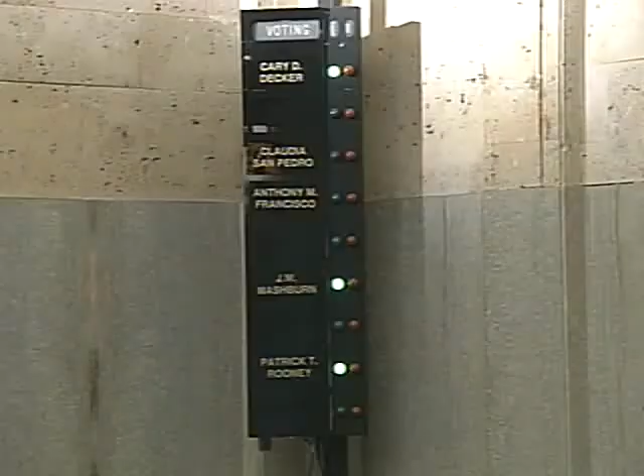Next, we need to move into our suburban request for funding. Agenda 3A is to approve the application of funding for the Moore Public School District scoreboard at Moore High School in the amount of $596,669. The only additional information I might add is at the time of the application, there was about $1.3 million in the Moore Public School account. This will leave a remaining balance of $757,000 for future project applications. The application meets the requirements of the MOU, and we recommend approval.

Do we need to approve these individually, or can we do it all as a group? Individually. All right, I'll make the motion, Mr. Chairman. The second. Quick question, do all three schools play at the same stadium? My understanding is that they do, that they have one primary stadium, but I can confirm that. The answer is yes.

Well, we're going to approve these as a group, I believe, aren't we? Right, and we have a motion. We need a second to the motion. Second. All right, then we'll vote. All in favor? Aye. Motion passes. Now, do we need to move on to B and C? No, that's included. We don't need any discussion on any of those. Okay.

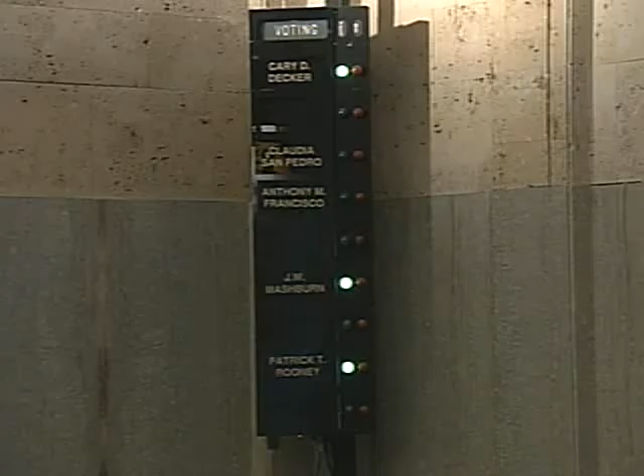The next item, item 6 on the agenda, is the approval of the schematic design report for project ES0063 at Arthur Elementary School. Thank you, Mr. Chairman. We're pleased to bring this schematic design to you today. It is Arthur Elementary. Boynton Williams and Associates is here representing this project and can make that presentation and also answer any questions that you may have.

I'm Christian Ballard, project architect at Boynton Williams Associates. I'm here to give our schematic design presentation for Arthur Elementary. Arthur Elementary is an elementary school located at Southwest 51st and Independence, and our task is through new construction and a complete renovation to bring this facility up to contemporary standards.

604 students. The existing facility is roughly 34,000 square feet, and we're proposing 24,685 square feet of addition.

The new addition will include media center, health clinic, administration, new restrooms, information technology, as all of your projects do. We have had our staff meetings, our teacher meetings, our community meetings, and we're here to present the scope of the project and also some input from them.

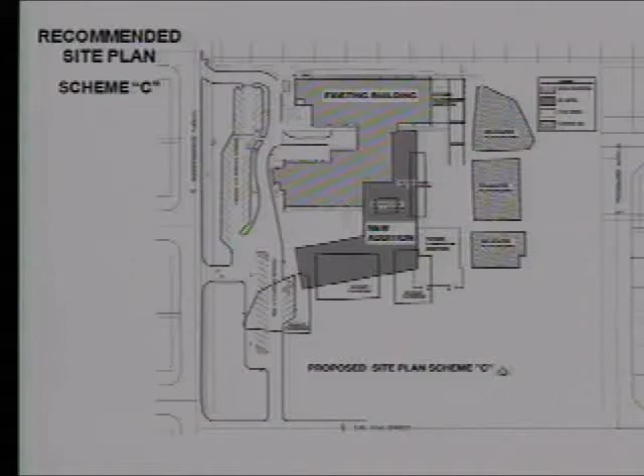Again, the new addition includes items such as previously stated mechanical systems. In addition to those, renovation items include playground equipment. This is skipping forward, I'm sorry. Which way is backwards? All right, I apologize for that. Once again, I'll start over.

The new addition will include an administration area, student health services, information technology, and restrooms, which was a big thing for the staff. Renovations include window replacement, window blinds, lighting upgrades, additional exterior parking, paint throughout, and plumbing upgrades.

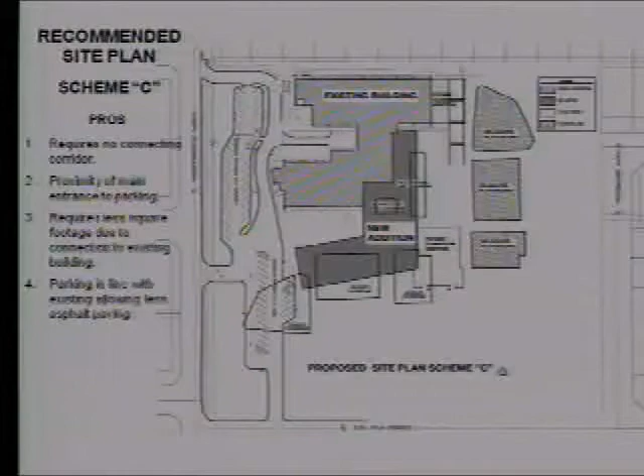This right here, Scheme C, is our recommended site plan. The pros of this include a drop-off location on the southwest portion of the new addition, and it's a very compact design. We're adding 21 parking spaces and increasing the parent drop-off area.

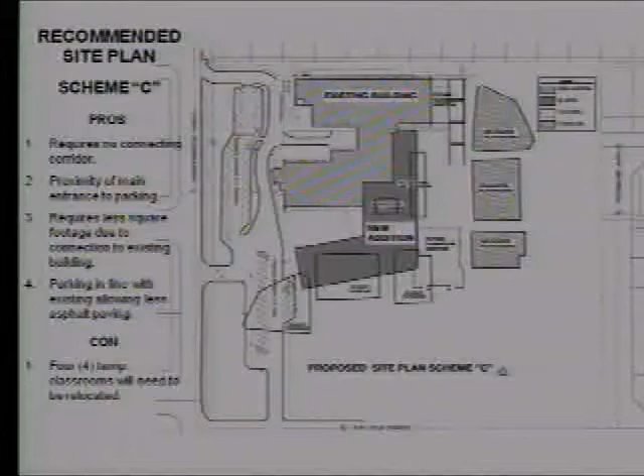A con of this design plan is that there are some temporary classrooms that are going to have to be relocated.

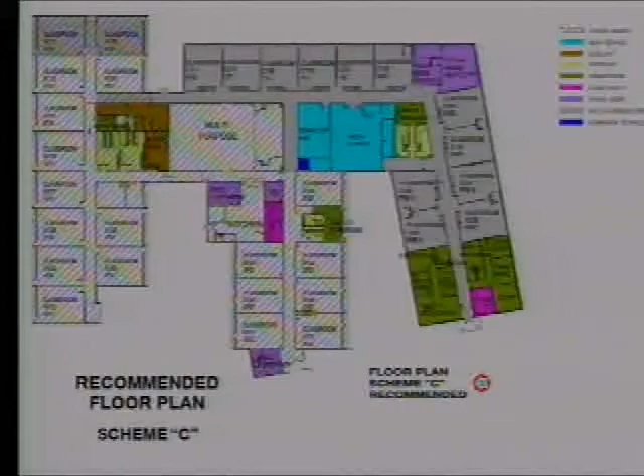Again, the administrative space we're adding is roughly 2,000 square feet. Student services, roughly 300 square feet. The health clinic, again, roughly 300 square feet. Total classroom additions, I think we're adding 16 classrooms, totaling roughly 10,300 square feet. The new media center, the existing media center, is in 2 classrooms that were initially designed that way and broken up into a media center.

It's definitely not a contemporary look, and we've added a new centralized media center. As you can see, we've also added some faculty restrooms. Again, the existing facility is roughly 34,000 square feet. The new addition is 24,600 some odd square feet, for a total facility square footage of 58,679 square feet.

Our cost estimate here is for the new addition, roughly $3.5 million. For the renovation, roughly $2 million. You see right there, we're a little bit under our PIP budget estimate. And we're right here in schematic design, and if approved, we're ready to start on preliminary design and continue on with the process. So again, I'll entertain any questions that you have.

Any questions or discussion? Cost per square foot on the new construction, what is it running today? Cost per square foot? I don't actually recall that amount. Okay.

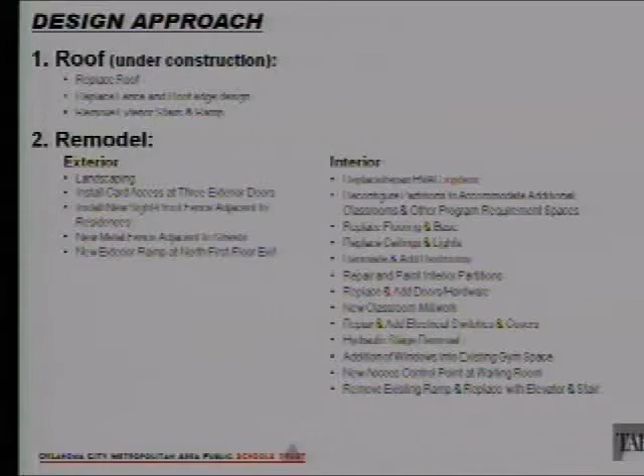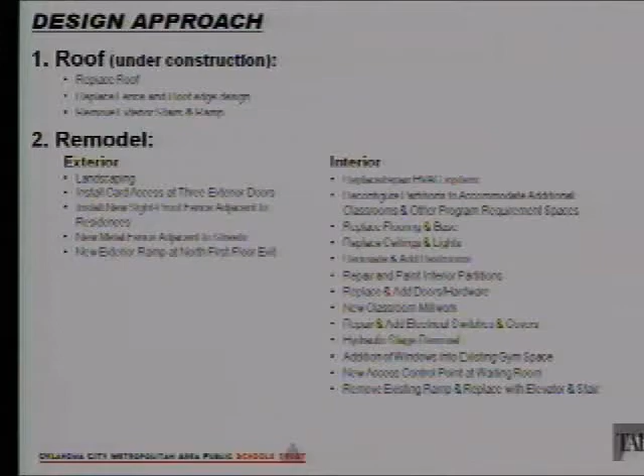Continuing on with the remodel portion of this project, Eugene Field is located at 1515 North Klein in Oklahoma City. This project has no building addition, only interior renovation with a few site modifications. We're completely modifying the air conditioning system, as it was not up to date and was causing humidity problems. We're also updating finishes, as is typical with the MAPS renovation, and updating the restrooms to be ADA compliant.

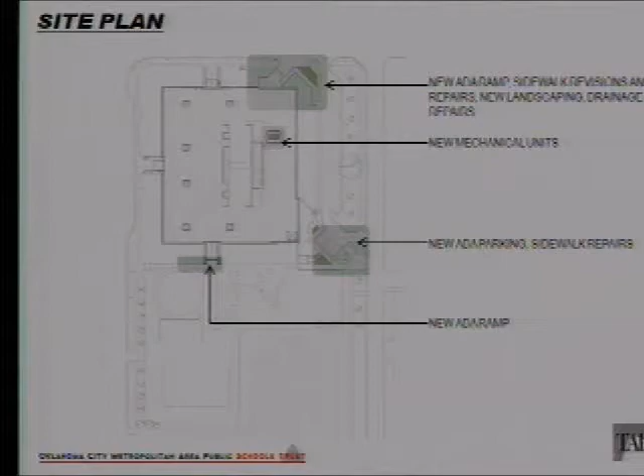On the site area, there are a few things we're modifying: ADA parking, and we're adding an accessible ramp to the playground, which currently has no good accessible way to reach it. We can do this directly from the building with a new ramp.

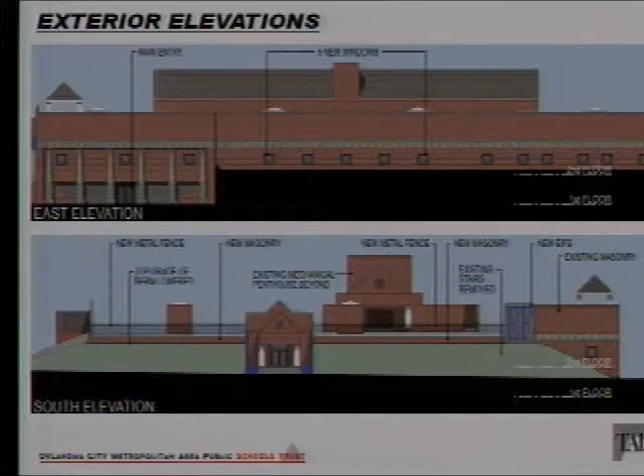We're adding more than five windows—actually five windows expressed on this facade, a total of 11 on the facility. These are going to increase the amount of light into the facility. As I mentioned, it's semi-underground, so additional light will really improve the quality of the lower level of the building.

On the first floor, the most underground portion, we're doing some modification to reutilize what was the cafeteria space, putting classrooms in that space and some other support functions, moving the cafeteria to what was the gymnasium space. We're also removing an existing ramp and in its place putting in a stair and an elevator. As I understand it, this was the only two-story school that did not have an elevator, so as part of this package it will.

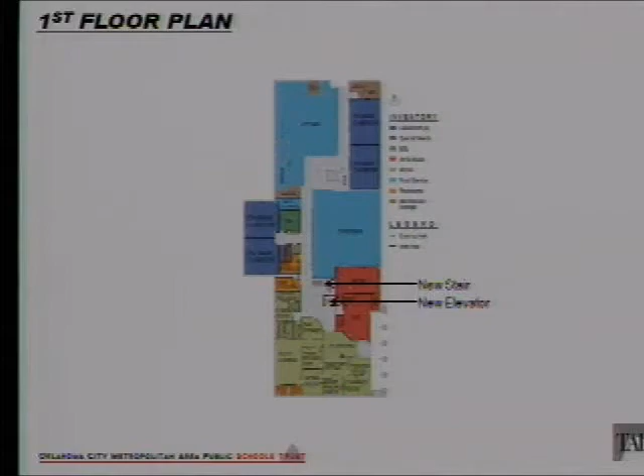For security, a few blown-up views here. We're doing some modifications in the office so we can better see who is coming in and out of the building. This is a blown-up area of the new stair and elevator location, centrally located so it can be seen from the front office. On the second floor, most of the classrooms stay in the same location, but some modifications were made.

The main thing we have done is move the computer lab upstairs. It was separate from the media center located downstairs, so we've pulled those together in a central location in the plan. You can see the four restroom cores that we are modifying on that level, and the areas of the new stair and elevator.

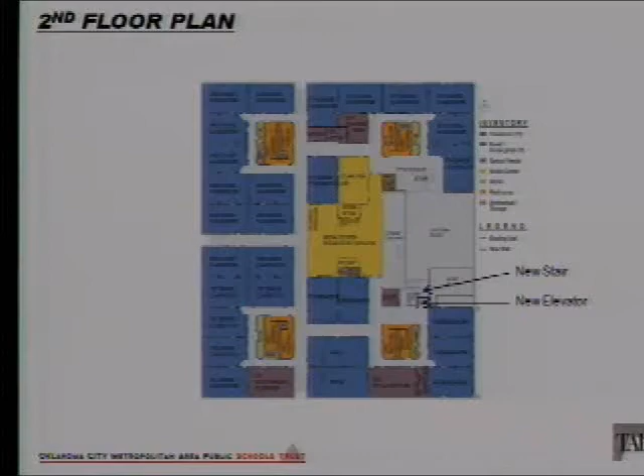The project budget is $3.98 million. Our current estimate is $3.95 million, so we are currently under budget. As mentioned, the roof, already bid and under construction, will be complete August 1st, barring some rain days. The remodel project hopes to bid, if approved, on August 17th, and be finalized around November 2011.

Thank you. Are there any questions? Any questions regarding the final plans?

Can you tell us if there were any requests made by staff or the community that are not incorporated in this plan? We were able to incorporate, I believe, most every one of those. A lot of those were updated restrooms, and even a key card access specifically was something that was a good addition. There were none that we were unable to satisfy, except knocking the building down and building a brand new one.

Any further questions? Do we have a motion to accept the plans? I move we approve. Moved. Second? Second. We'll call the item to vote. Motion carries. Thank you very much.

The next item is to approve the final plans and specifications for Northwest Classen High School, and authorize the secretary to advertise for bids to be received August 10th, 2010, project ES 0078.

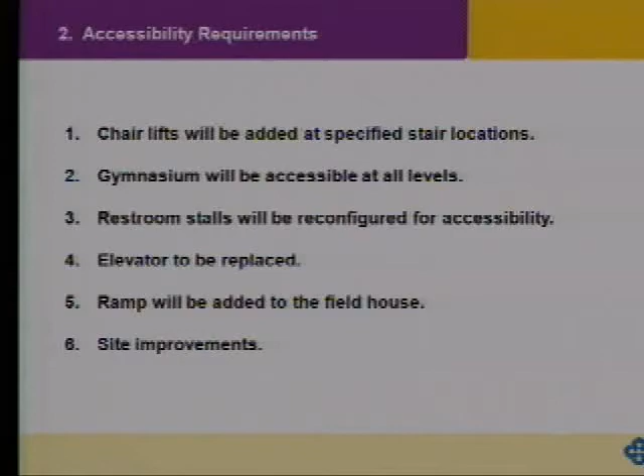As for the interior spaces, all classrooms and corridors will get new paint. The existing corridors are terrazzo, so they'll be left as they are. We'll be adding wayfinding areas, which will help with the longevity of the halls. It's an extremely huge building, 277,000 plus square feet. It's long and linear, and we're going to use wayfinding areas to help freshmen and to just kind of break up the long lengths, along with new floors.

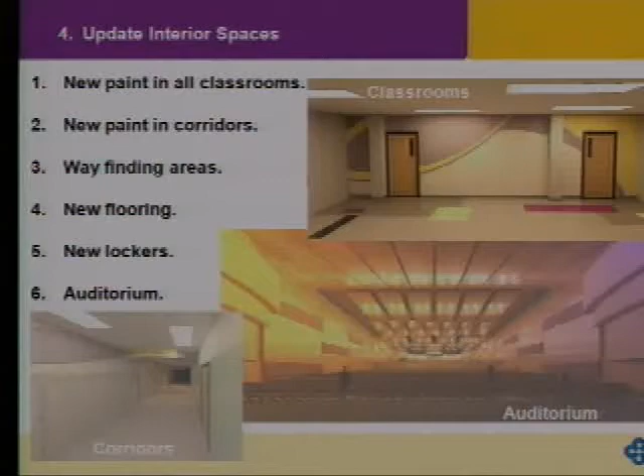In all the classrooms, we'll be removing the VAT and replacing it with VCT. The principal has requested 1,000 new lockers, and there will be some really nice upgrades to the auditorium to bring it up to current standards. Also, as far as the auditorium goes, we'll be putting in a basic theatrical package that will allow for upgrades that may be done in the near future, which will be funded by the Friends of Northwest Classen.

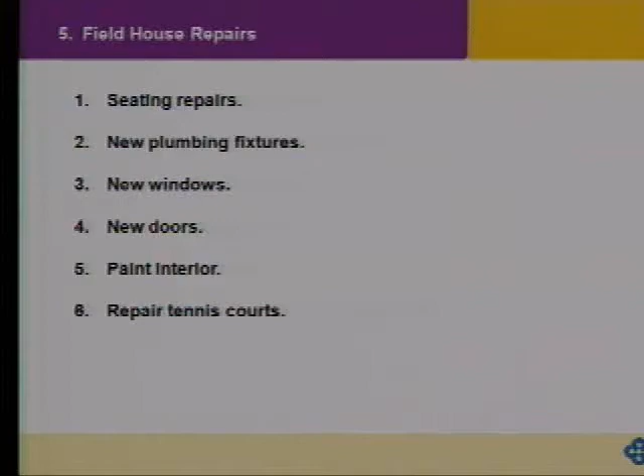And the field house repairs - it's basically a concrete building, so all the seating will be patched. All new plumbing fixtures, all new windows, all new doors, interior and exterior paint. As far as the tennis courts go, that's been added as an alternate in the bid package.

As far as the budget, our budget was 12.9 plus. The Phase 3 estimate came in at 13.29.

5.5 million plus is going to mechanical, electrical, plumbing, and data - very extensive. The rest is basically general conditions. There's a little bit of demo and site work, very little shell work since we're not doing much of anything. The shell work basically is flipping doors for handicap accessibility and adding walls to create family accessible bathrooms. Interior work basically encompasses paint and flooring.

Any questions or discussion regarding Northwest Classen? On the budgeting?

You said chairlifts and elevators? Yes, sir. The elevator will take you from the first floor, or the main first level, to the second first level. However, there are several intermittent levels that kids can't even get to if they're wheelchair bound. So right now there are two existing lifts, and we're going to be adding five and replacing those two. You just kind of go along the side of the stairs - it's only like a 7 or 8 foot level difference. But yes, it does mount to the wall, flips up when it's not in use, flips down and rolls down.

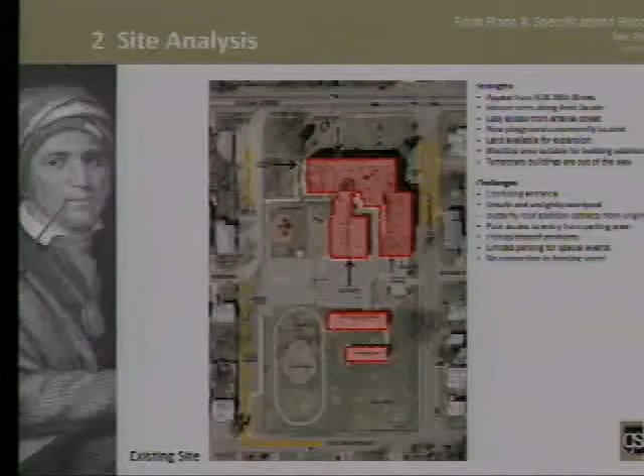This is the existing site plan. You'll notice the portion to the north bordered by the red dashed line is the existing building footprint. Below that to the south, near the running track, are existing portable buildings currently in use. The site is bordered on the north by Northwest 36th Street, on the east by Altadena, and on the south by Northwest 35th Street. The original building, the very far north portion, had its first floor built in 1930 with the second floor added in 1940. The two wings stretching to the south were built in 1948 and 1949.

One of the key elements of the design is to reestablish the front facade along 36th as the main facade of the building. Originally it was accessed by pedestrians, and that was how you got to the building, but with vehicular traffic, we sort of abandoned that very nice historic front. The black arrow to the south, off what we call the butterfly wing—the southwest portion of the main building—that has sort of become the front door, which is actually the back door. To the west, there's a long distance between the drop-off lane and where the students have to come in, so they have to traverse that in bad weather and all situations.

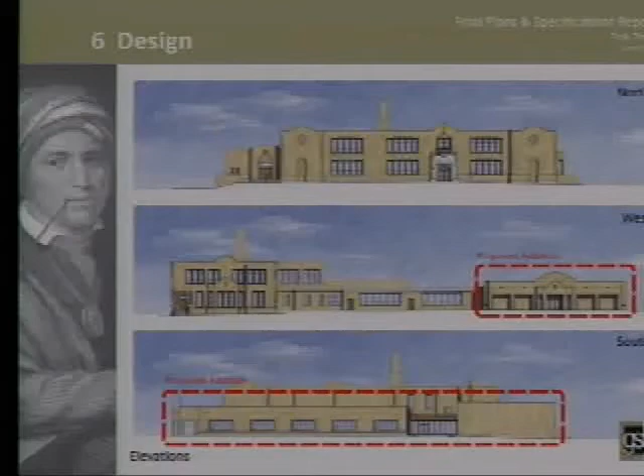We've rendered some of the exterior elevations here for you to look at. The top is the north elevation along 36th Street, which remains pretty much as it is. There's a new handicap ramp to the far left, which gives access to that portion of the building.

We've kept with the historic character and the materials there. The middle is the west elevation, indicating the new addition to the right and the covered porch, and you can see that that sort of anchors the architecture. It caps off the end of the butterfly wing, as we call it, which is a departure from the existing architecture, and it alleviates that great concern of the community and helps anchor that.

We've also tried to pick up some details as well. The south elevation is shown on the bottom. You see that to the left is the porch, the classroom wing, the connector, and then the back of the stage. The back of the stage is where a future gymnasium will be added, and that's currently in the works through the bond program, I believe it is.

We have made provisions in that wall and in the structure for easy acceptance of that future addition. Try to buy some things now, make it easier in the future.

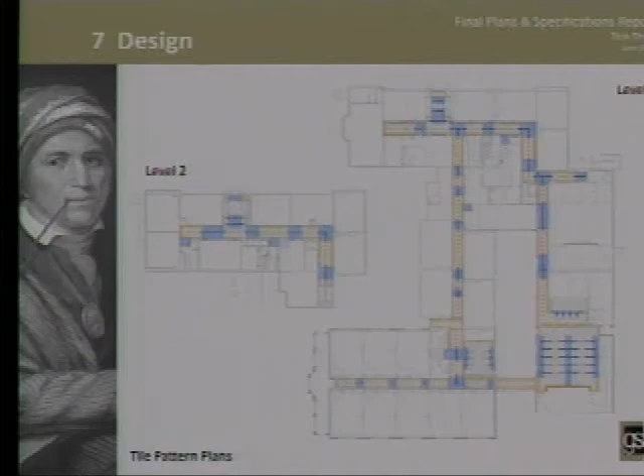This slide represents the corridor pattern of the vinyl composition tile. The school is named after Sequoyah, and it tries to pick up on some of the Indian artwork and a reference to Indian beadery that would be appropriate for that school.

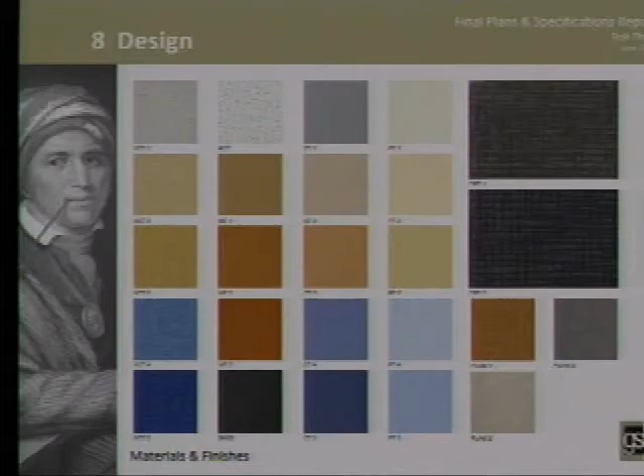This slide represents the interior color finishes, paint, tile colors, and so forth. The warm colors, the oranges and yellows, are sort of the existing interior and picks up on that. The blue are the school colors, and we were trying to achieve a balance in those.

Schedule: we have completed all the way through final plans and specifications, and those are ready for bidding now. Upon approval would be July this month. Construction is anticipated to start September of 2010, with an estimated completion date of December 2011.

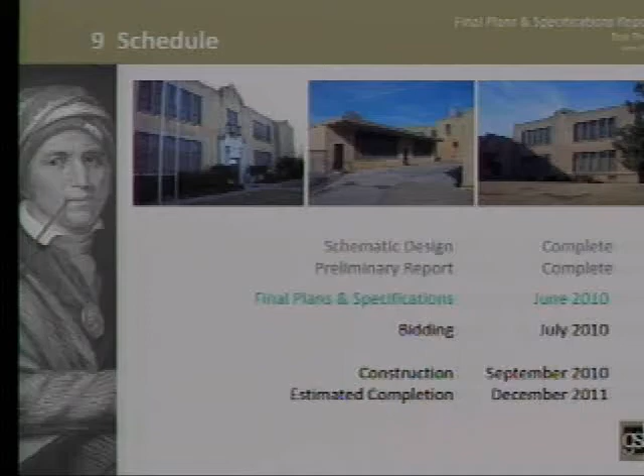The original construction budget was a little over $4.3 million. Currently, we sit at a renovation cost of 1.9, the new addition at just over 2.6, for a total construction cost of a little over $4.5 million. There are the two alternates I mentioned before: the east on-street parking and the additional kitchen equipment.

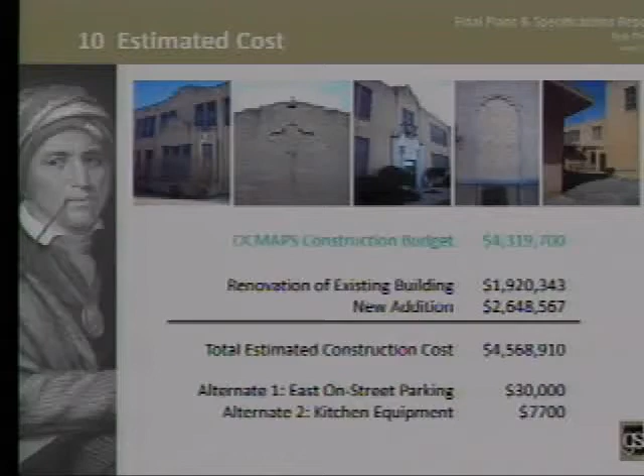Does anyone have any questions?

On the north part, is there going to be an entrance? You said they're going to make parking there. Yes, let me go back to that site plan. There is parking, new visitor parking, and it also functions as an additional drop-off.

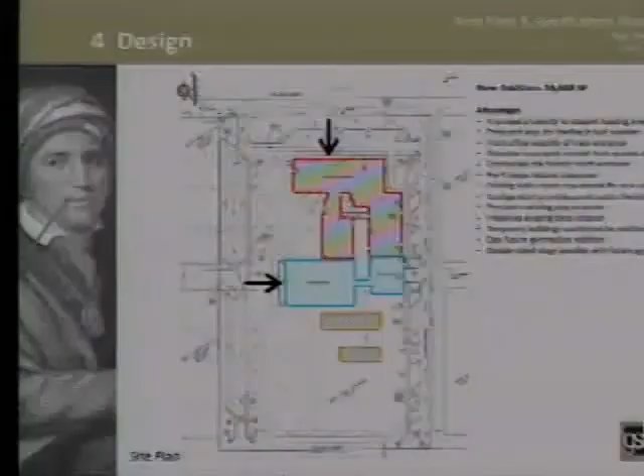There we go. You see there's a new drive, and that's also going to function as a drop-off area for the pre-kindergarten. I didn't go into all that, but the far northwest corner of the building mass is the current pre-kindergarten, and they love that space, and in the design we were able to keep that.

So there's a third space where you can direct traffic. To be more detailed, once they drop off on the far southwest, they're going to turn left and exit to the west, which is what they're supposed to be doing now, but because of some other functional issues with their drives, it isn't working very well. So we worked that out with the staff and the administrators.

Could you repeat that? They're going to enter from the southwest? They will enter from the northeast and go south down Altadena.

There will be no drop-off or pickup along Altadena. They continue south to the south portion of the site, and they queue along 35th. They will turn north through the drive. They will drop off up near the building where the black arrow is, and then they will turn left. Now, north of that is teacher parking, and we have a controlled entry off of 36th.

That entry will not allow people to queue off of 36th during drop-off and pickup times. We worked that out with the traffic department at the city, and there's a control gate that they are going to drop during those times. Currently, they have to stand out and do a lot of monitoring with umbrellas and the weather and so forth. So we've worked very closely with the school administration on all of these, and we've met with the city. There's currently a variance for some of those issues, and a new curb cut and the parking off of Altadena, the on-street parking, is in the works through the city.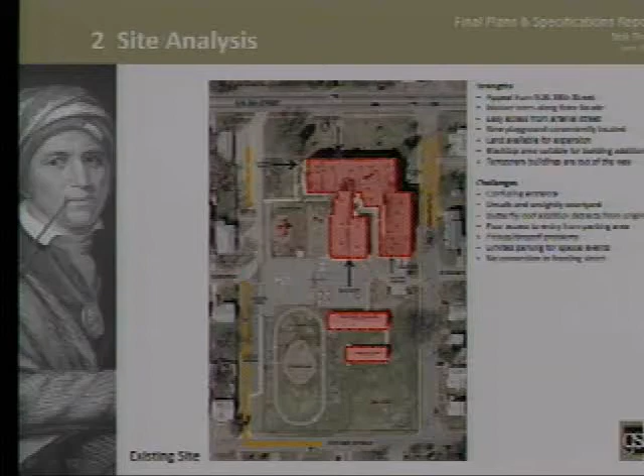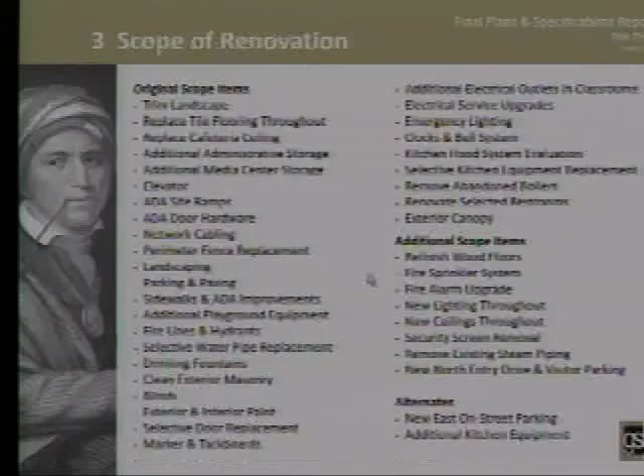You see that zigzag in there? Anyone can hide in there. There's places behind current boiler flues and things—it's an issue from just a monitoring standpoint. So when you block it off, it's a controlled courtyard. That's what I meant by enclosed. It's kind of...

You can't get to it at all—you would have to climb over the roof. It's a typical courtyard, yes. Thank you. And there is a security system that, should there be any Spider-Man issues, or someone getting in, that's part of the design, yes.

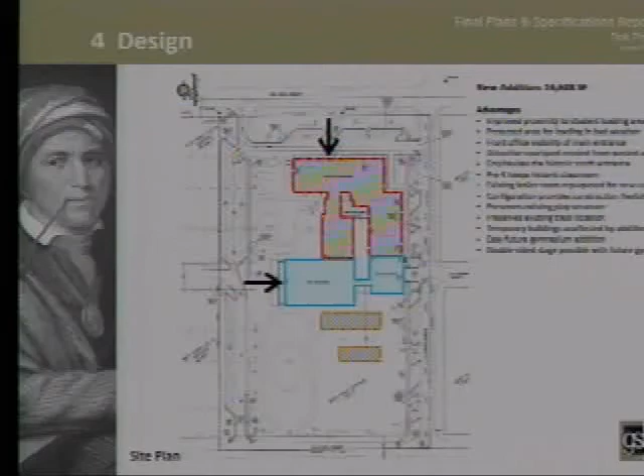Any further questions? You mentioned the desire to emphasize the north face, the old main entry of the school. Yes. And looking at this slide, you have an arrow pointing to that north face—how does that get emphasized? Well, because there is parking there and because visitors—one of the challenges now, if you're not very familiar with the school, is you sort of drive around the block trying to figure out where to go and where to get in.

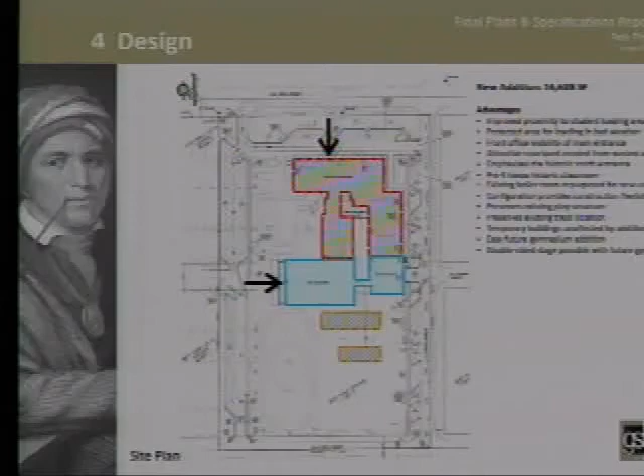By being able to come directly off of 36th and park there in the front of the building, you know where to go. If you look at the north elevation, there's a grand, sort of historic entry at that point, and it's very obvious. The problem is now there's nowhere to park anywhere near that, so you don't know where to queue, and you kind of go in the back.

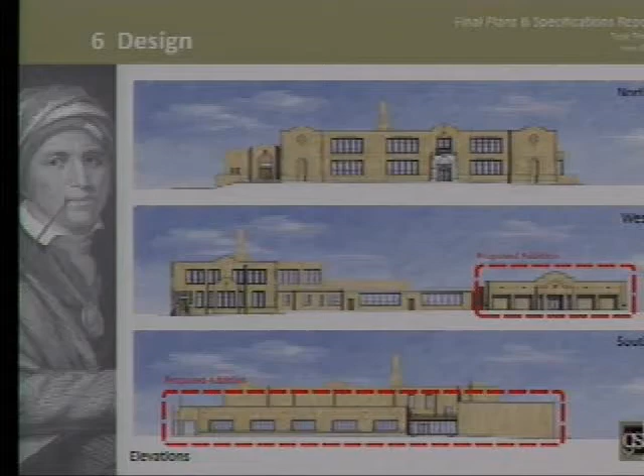The reason for my comments is during the hailstorm last month, I was driving and seeking refuge from the hail, and I found myself in Sequoyah's parking lot trying to get under something. While I was sitting there, I did notice the grand entry you're talking about. It really is beautiful. So I would hope that becomes an emphasis of the project.

On slide 3, you say clean exterior masonry. I think that's very important, and I hope that'll be emphasized in the project. We are pressure washing the entire exterior face of the existing building, trying to clean that up. And in inclement weather, that porch we worked out with the administrators and staff is going to be very critical so the kids don't have to do what they're doing now.

Eric, I noticed on the memo that it says we're within budget, but the estimate we saw was a little bit over, I believe. Do we need to adjust that?

Any further discussion? Do I have a motion to approve the project? So moved. Do I have a second? Second. Call the motion to a vote. Motion carries. Thank you.